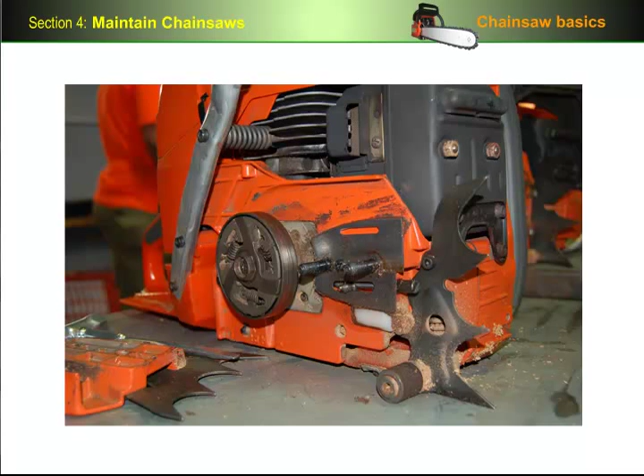The topics we'll cover are powerhead maintenance, guide bar maintenance, and chain sharpening.

The powerhead is the body of the chainsaw. Here's a basic checklist for carrying out a daily service on the powerhead.

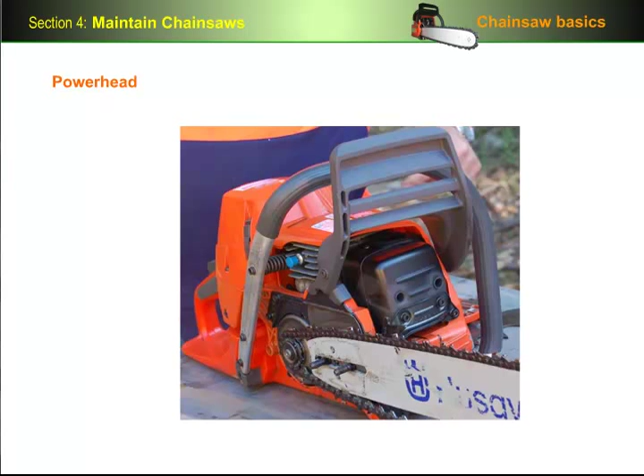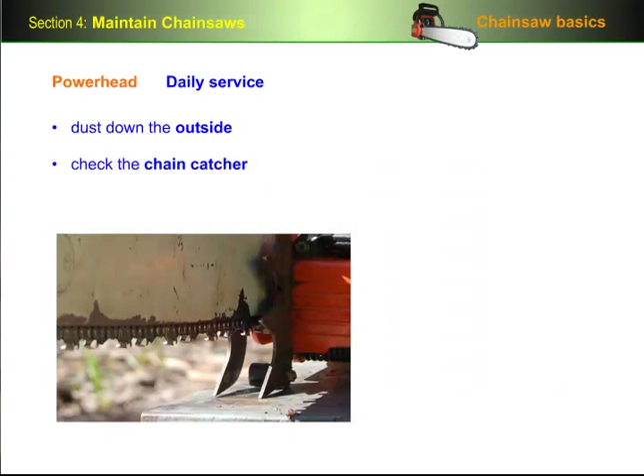At the end of each day's work, you should dust down the outside of the powerhead with a cloth or brush. Check the chain catcher to make sure that it's firmly fixed and not damaged, and that the throttle control and on-off switch are operating normally.

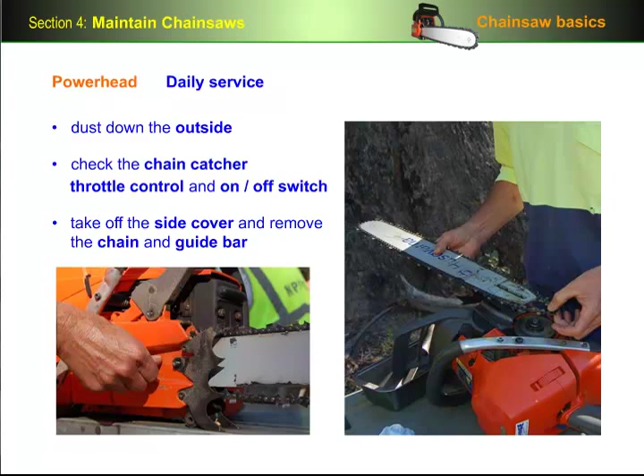Take off the side cover and remove the chain and guide bar. Clean around the clutch and drive sprocket with cleaning fluid and check the components for wear or damage.

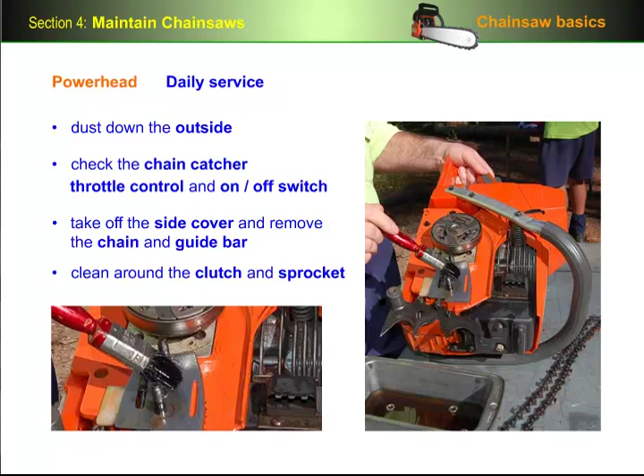Be careful when you're cleaning around the oil outlet for the guide bar to make sure no particles block up the hole. Clean out the inside of the cover, especially around the brake band if that's where it's fitted. Also check the brake band for wear or damage.

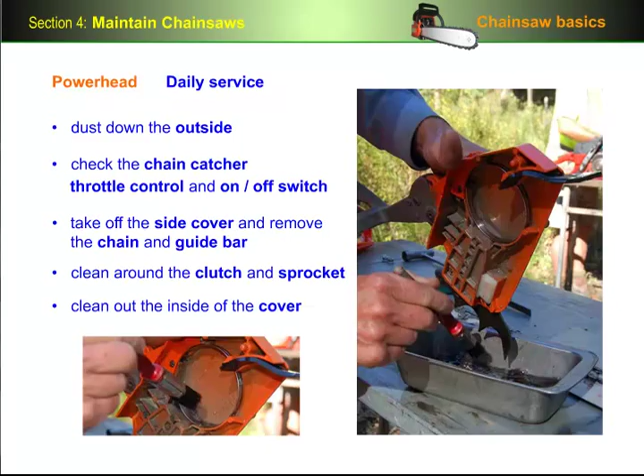Take off the top cover and clean the inside, including around the spark plug and the cooling fins on the motor, and check the spark plug lead to make sure that it's firmly in place.

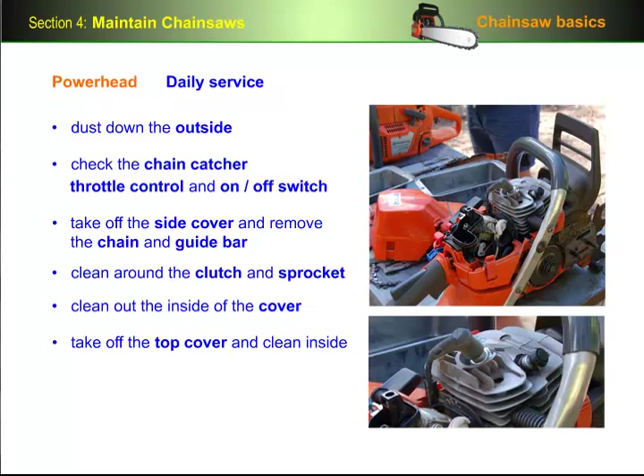Take off the air filter and tap out the dust. If it's still dirty, soak it in a solution recommended by the manufacturer. If it's damaged, replace it with a new one.

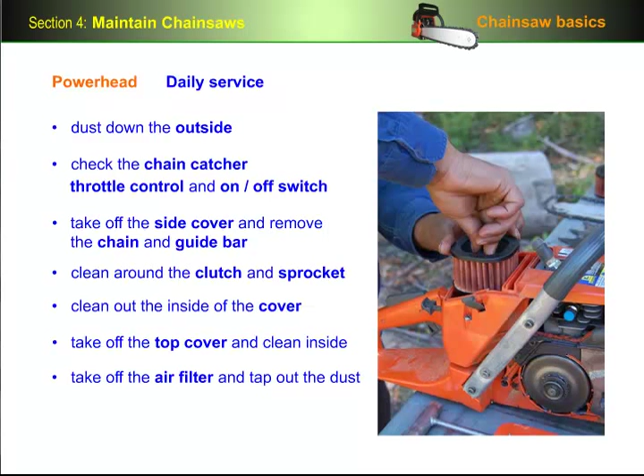Finally, check any other fittings to make sure they're secure and undamaged.

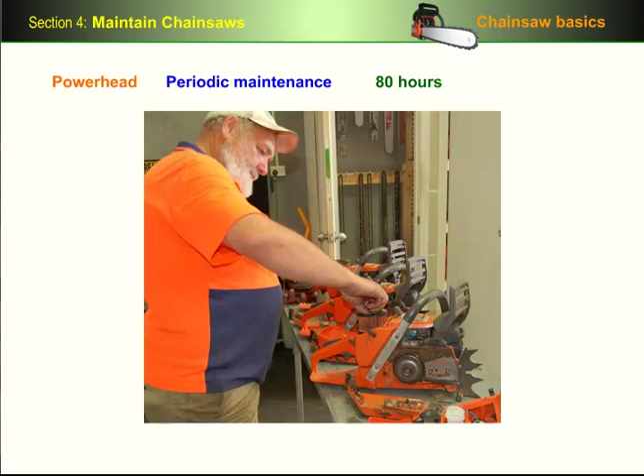A more extensive periodic maintenance needs to be carried out every 80 hours of chainsaw use. This is most likely to be done by the maintenance staff at your workplace or the local dealer.

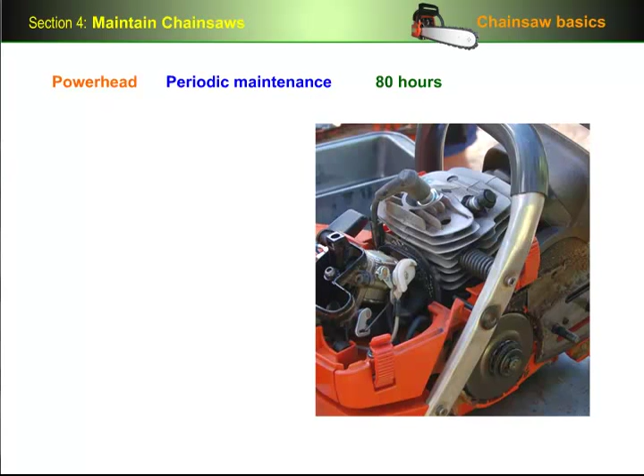During this service, the mechanic will check the spark plug by examining the gap and making sure the connection is sound. Replace the fuel filter if it's clogged, and wash out the fuel tank if necessary.

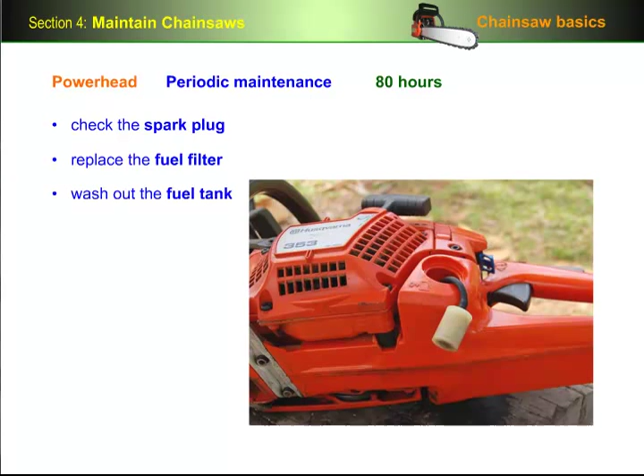Remove the fan housing and clean the fan blades. Check the anti-vibration mountings for looseness or deterioration.

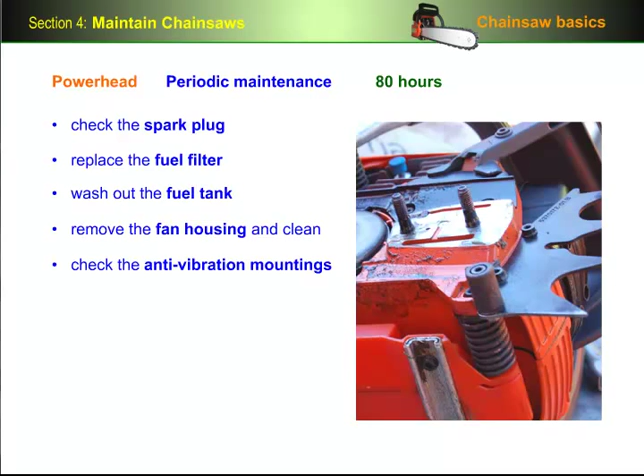Check the drive sprocket for wear and replace it if necessary. Some manufacturers recommend that the drive sprocket be replaced every time you fit a new chain. The sprocket bearings also need to be greased at regular intervals.

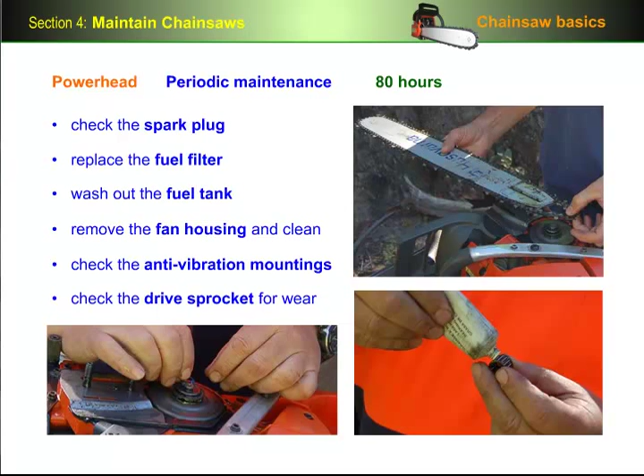And if the motor isn't running properly, the mechanic will also check the carburetor and adjust the idle and high and low speed jets if required.

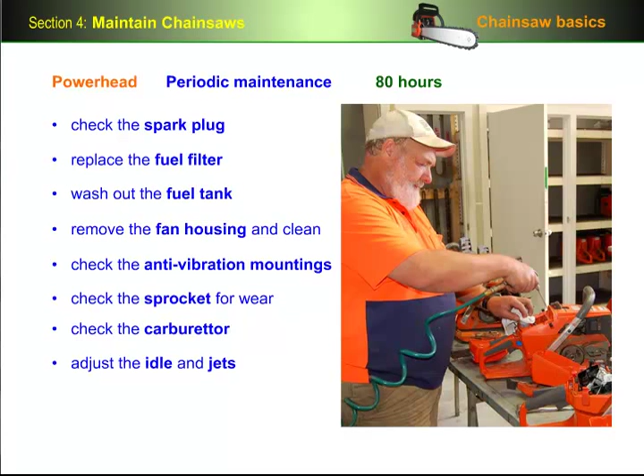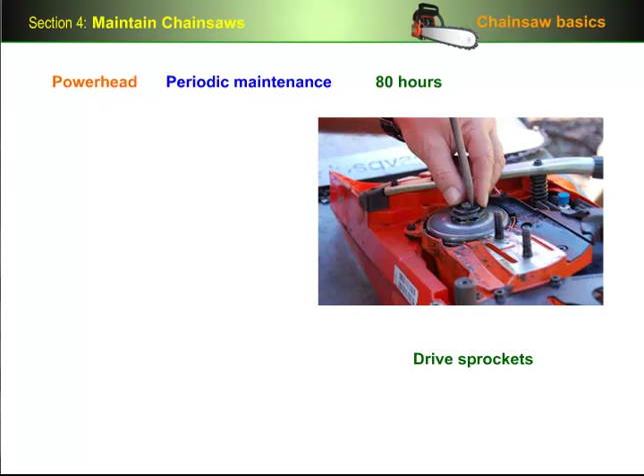Before we leave the powerhead maintenance, let's look at the two basic types of drive sprockets that you're likely to come across. A spur or fixed sprocket is permanently attached to the clutch drum, so when it needs to be replaced, the whole drum is replaced. A rim or floating sprocket, on the other hand, slides onto a hub which is welded to the clutch drum, which means that you can replace it separately.

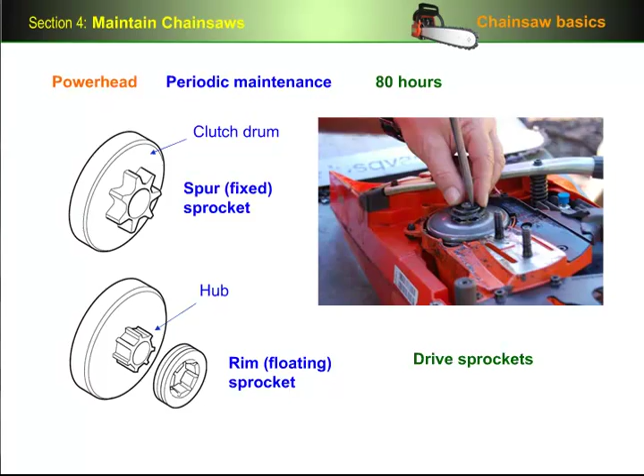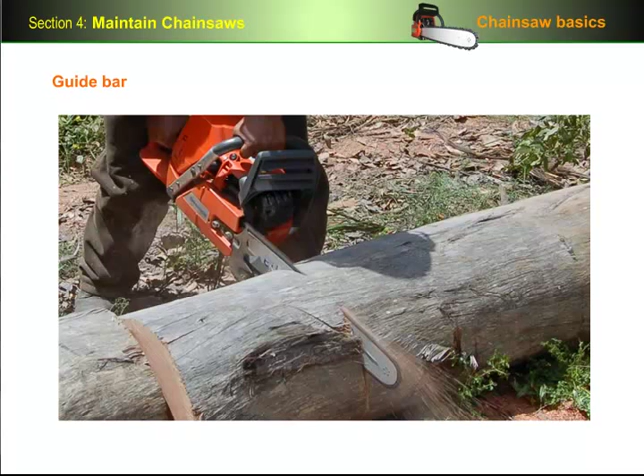The guide bar needs to be in a sound condition to allow the chain to run through it smoothly at high speed, particularly when it's under a heavy load while it's cutting. Here's a checklist for the daily service you need to carry out on the guide bar.

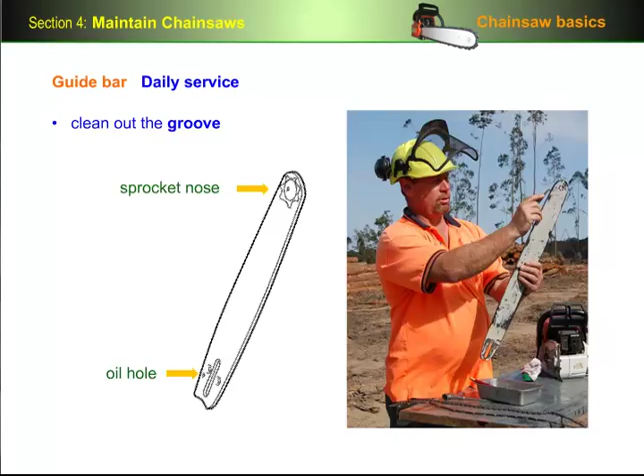Clean out the groove all the way around, paying particular attention to the oil holes and the sprocket nose. Check that the sprocket nose rotates smoothly.

Each time you put the guide bar back on the saw, turn the bar over to help even up the wear on both sides. The best way to remind yourself which way the bar should go is to look at the writing on it before you take it off and see whether it's the right way up or upside down.

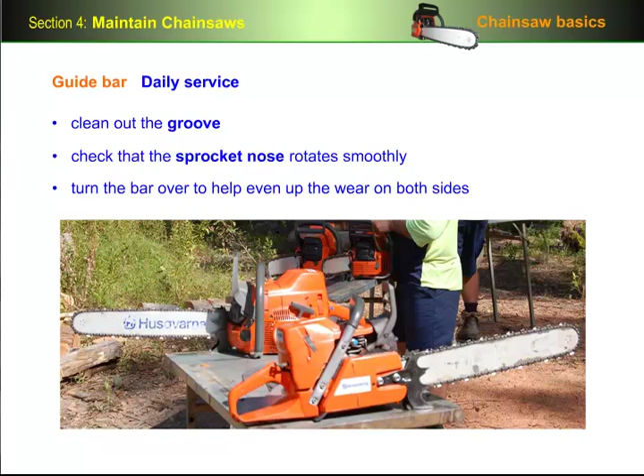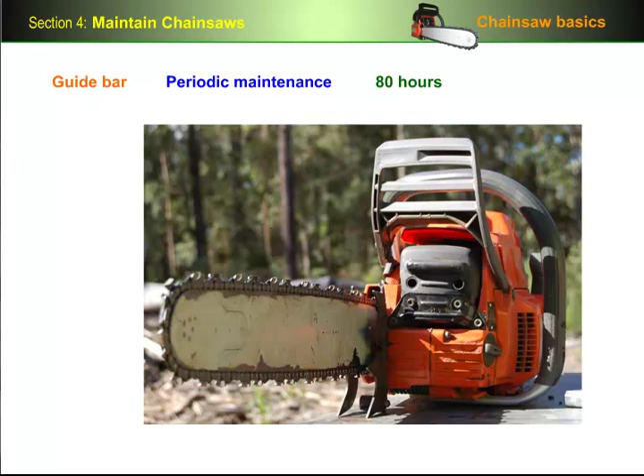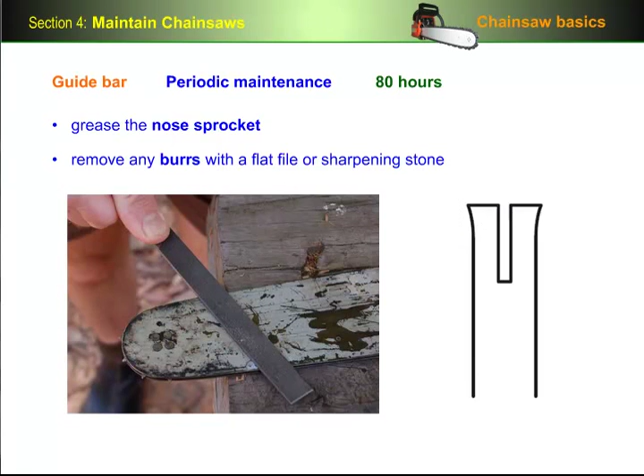Like the powerhead, the periodic maintenance on the guide bar should also be done every 80 hours of chainsaw use, where either you or your maintenance person should grease the nose sprocket if it's recommended by the manufacturer, remove any burrs on the edges with a flat file or a sharpening stone, and check that the rails are even and that there isn't excessive wear in the groove that would make the chain sloppy.

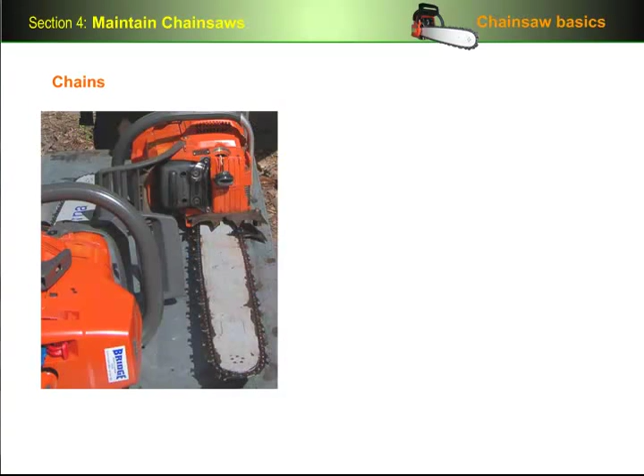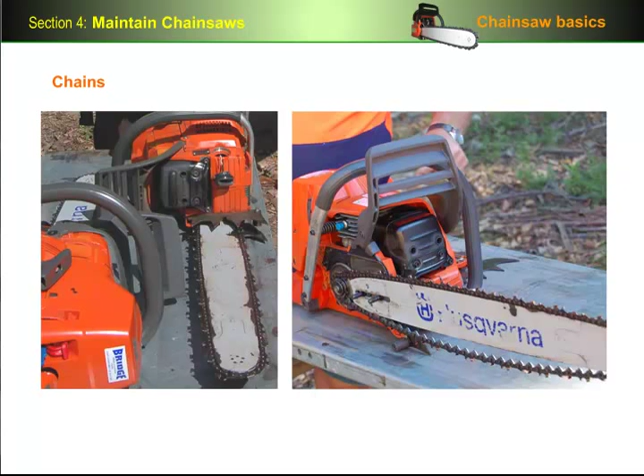Now let's look at chains. There are different designs and sizes for chains, with particular ones being used for certain types of cutting and different saw and guide bar sizes.

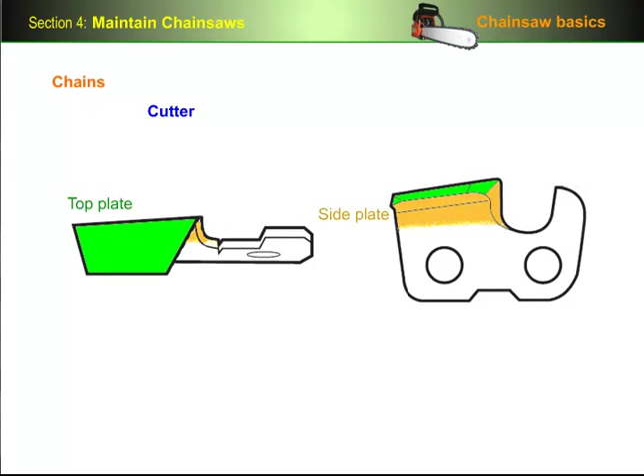However, all chains have the same basic components. The cutter has a top plate and a side plate, both of which are sharpened at the front to a fine edge. The area where they meet is called the working corner, because it's where the cutting action begins.

The depth gauge at the front of the cutter controls the amount of wood taken out at each bite, and is set at a height that allows the cutter to remove just the right amount of wood for maximum efficiency.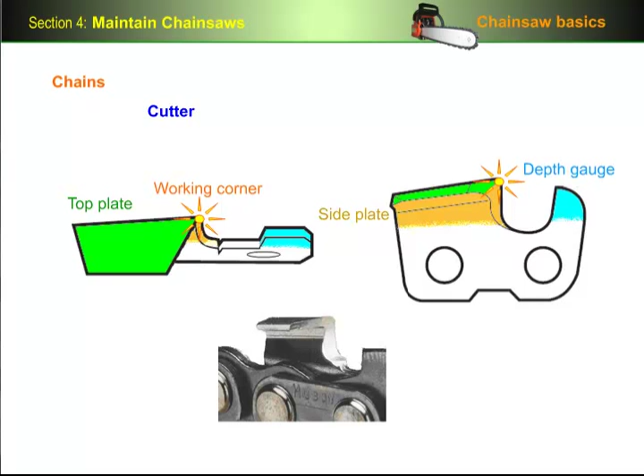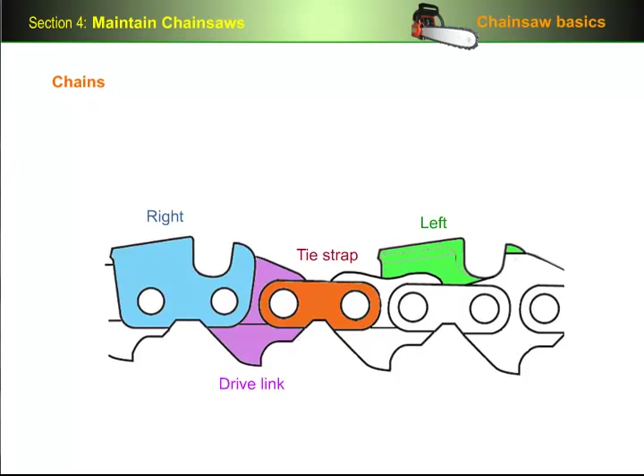Right and left cutters are positioned alternately along the chain to enable the saw to cut evenly, with tie straps and drive links in between, attached with rivets. Each drive link has a tang at the bottom which allows the sprocket to drive it forward.

The hook at the front is also designed to pick up oil for lubrication in the bar groove, and to keep the groove clean as it runs through.

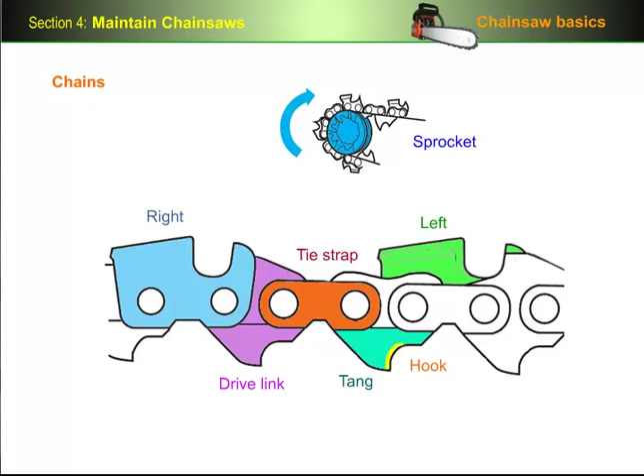Reduced kickback chains have some form of ramp on the drive link or the leading edge of the depth gauge, to help guide obstacles smoothly over the top of the depth gauge.

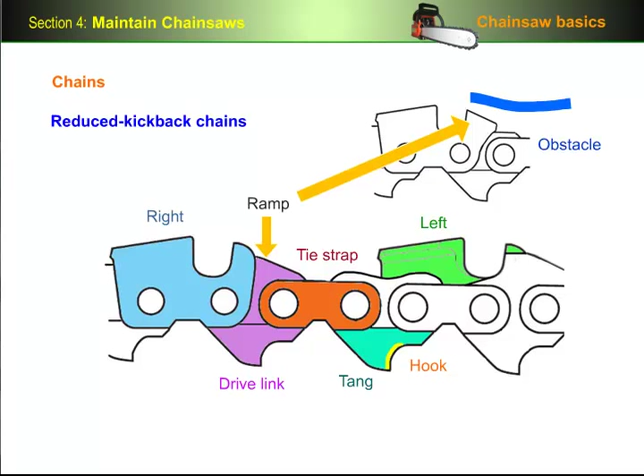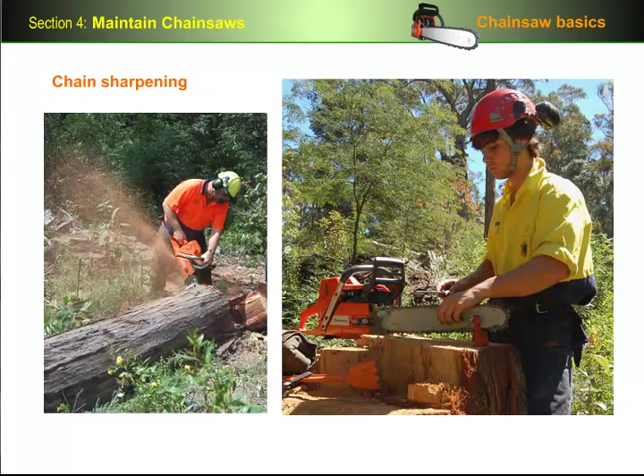Chain sharpening needs to be done frequently, such as every time you fill the tank with petrol. But you may need to do it more often than that, especially if you're cutting through a log containing dirt or a termite pipe, or if the cutters accidentally hit the ground while the chain's still moving.

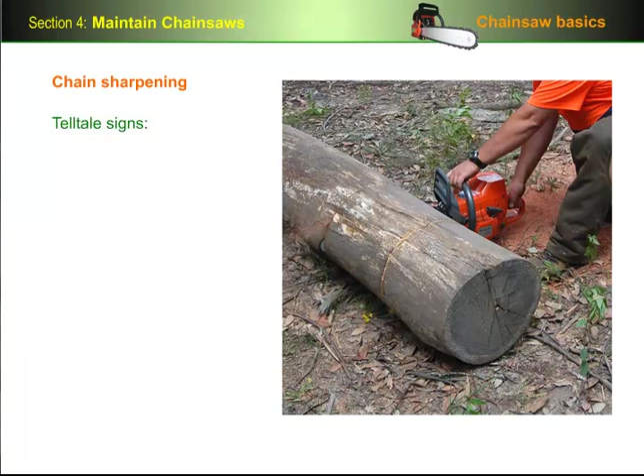The telltale signs that your chain needs sharpening are: the sawdust produced goes from small chips to a fine powder, you need to apply more force than usual to get through the cut, or the saw starts to run off in the cut.

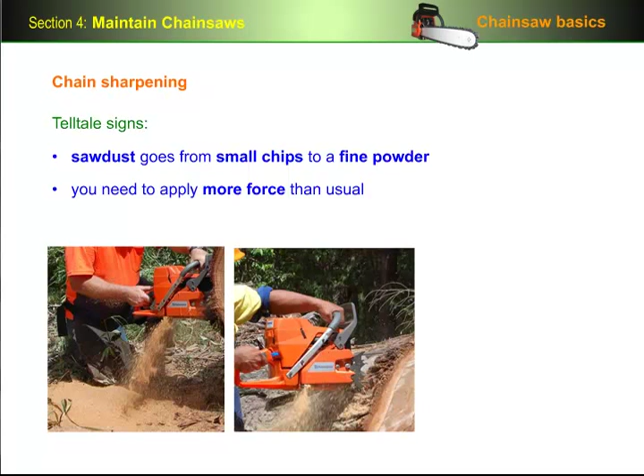Before we look in detail at sharpening techniques, we need to talk about the 3 basic profiles of cutters available, because this will affect the way you sharpen them.

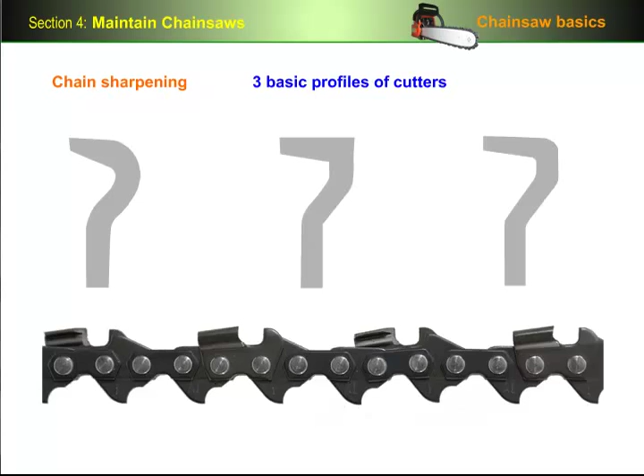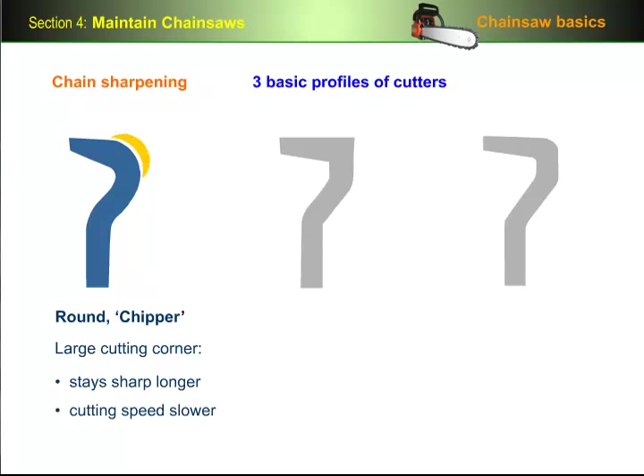The round or chipper profile has a large cutting corner, which helps it to stay sharp for longer, but makes the cutting speed slower. The square or chisel cutter has a very fine cutting corner, so it cuts faster, but is more easily blunted by abrasive materials.

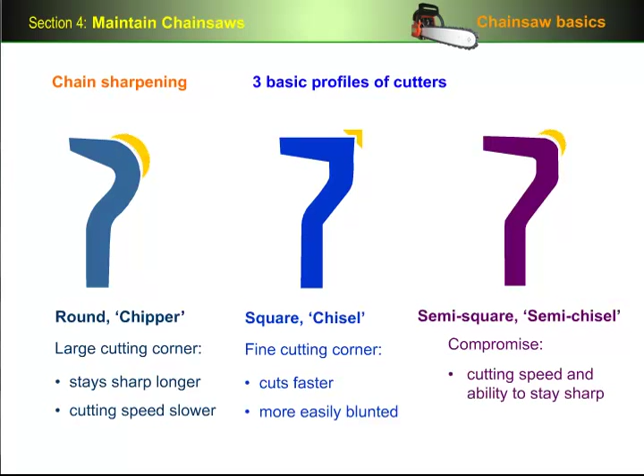The semi-square or semi-chisel profile is a compromise between the round and square profiles in terms of its cutting speed and its ability to stay sharp.

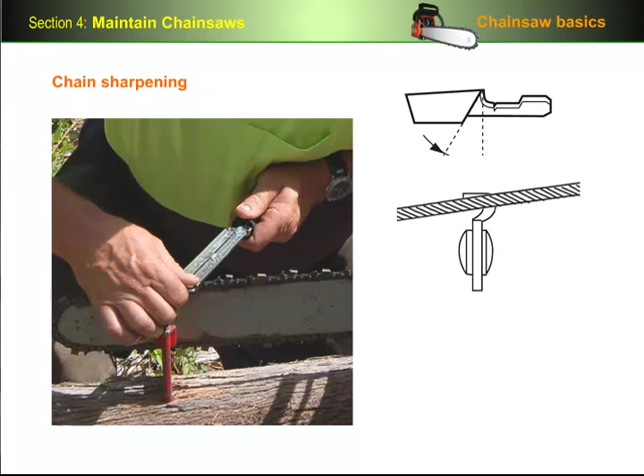The file size you use and the cutting angles you work with will be determined by the profile you're using and also what pitch the chain is.

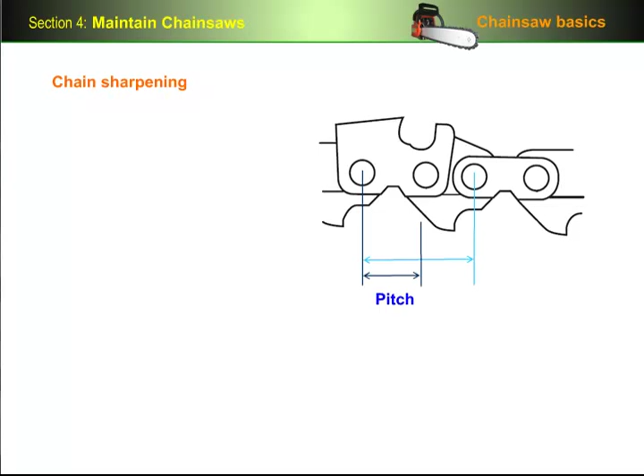Pitch is measured by taking the distance between 3 consecutive rivets and halving it. Naturally, the pitch is always going to be the same for the drive sprocket and the nose sprocket.

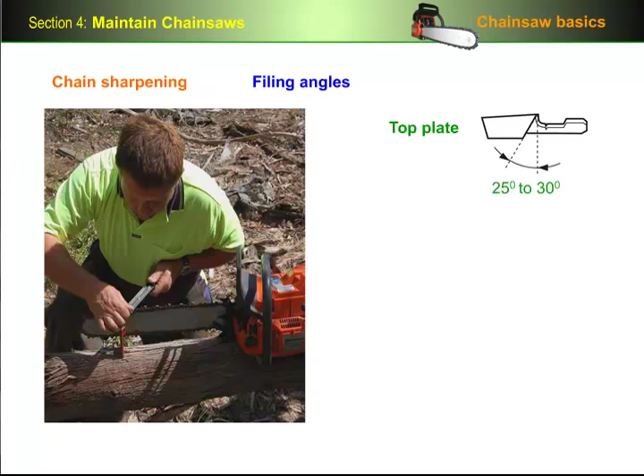The filing angles will be set by the manufacturer. Top plates are often filed at between 25 to 30 degrees, and the side plate is generally filed either flat or with a 10-degree tilt, depending on the profile you're using. But always check with the chain manufacturer's specifications before you start to sharpen your own chain.

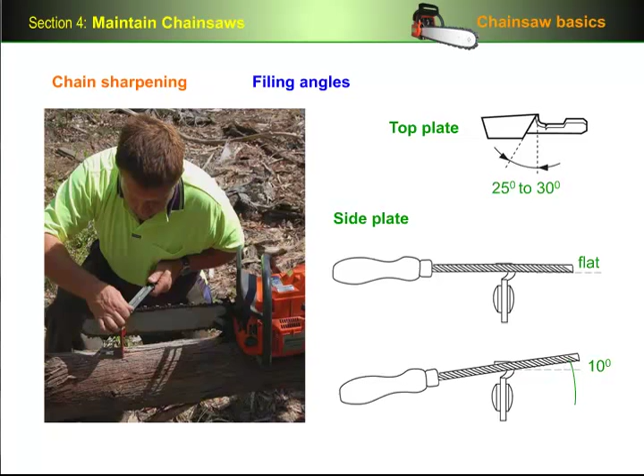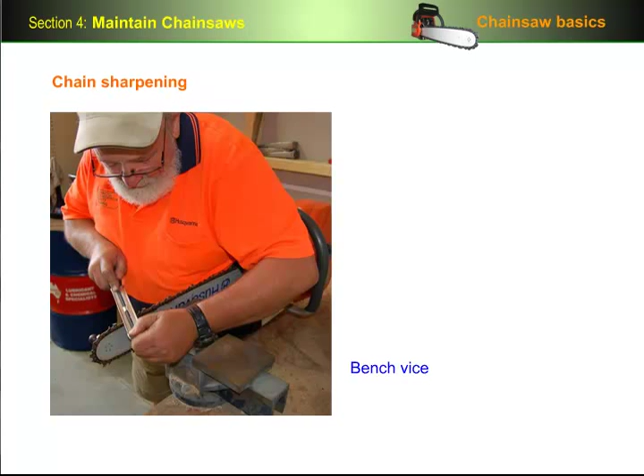The easiest way to file cutters by hand is to use a vise and a file holder or gauge. The vise can either be a bench vise, if you're in a workshop, or a stump vise, if you're out in the forest. There are different types of file holders around, so you can choose the one you feel most comfortable with, and follow the directions on how to use it.

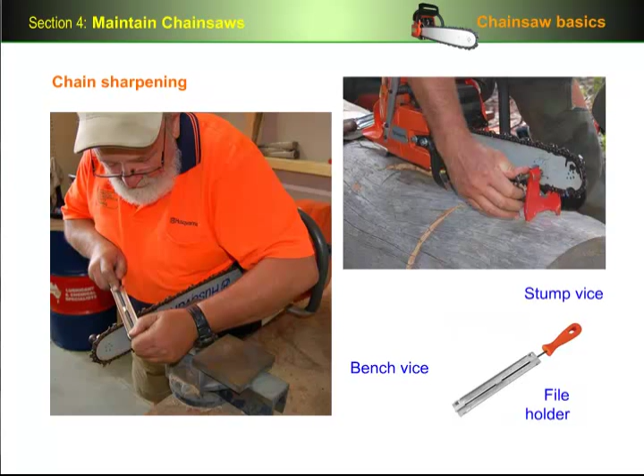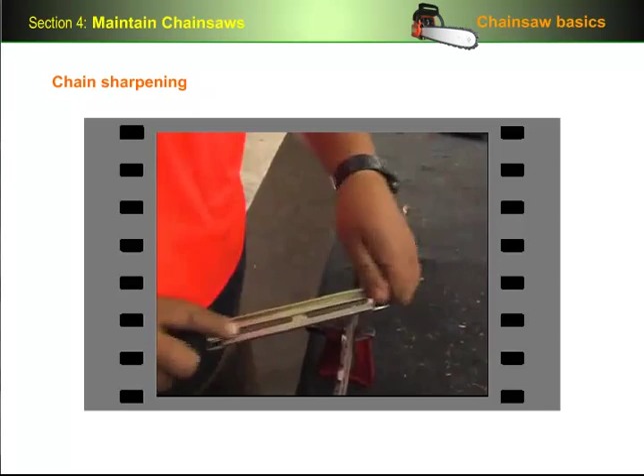Here's some general hints on filing cutters. Use a full-length stroke, filing from the inside to the outside, and file until you've removed all of the damage from the top plate and the side plate. Make sure that the file holder rests on both the top plate and the depth gauge.

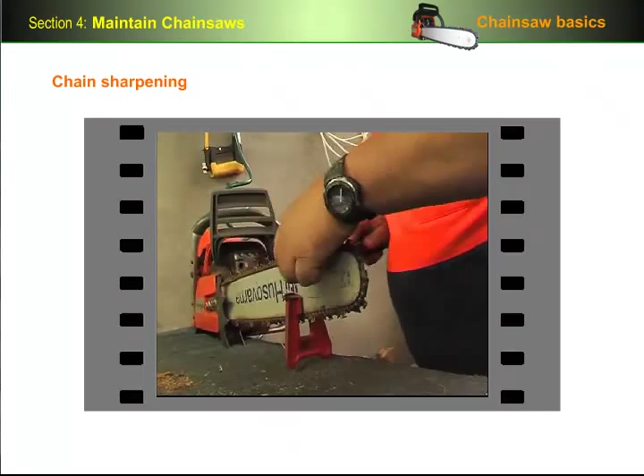Work around the chain, skipping every second cutter so that you're only filing the cutters that face the same way, and then change sides to do the other set of cutters.

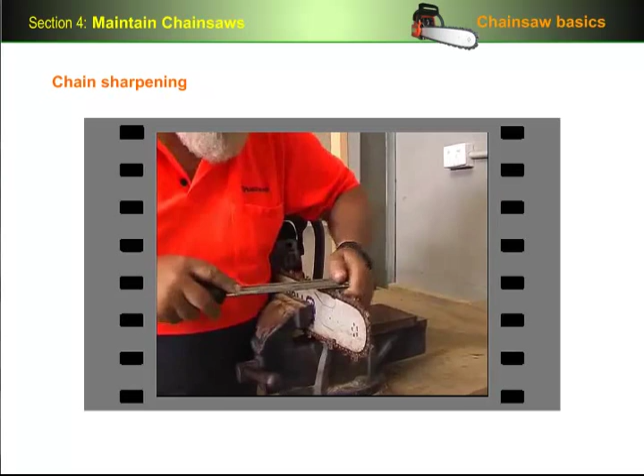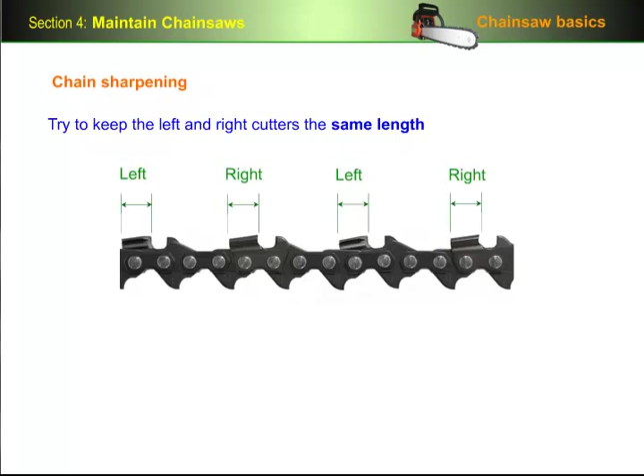Try to keep the left-hand and right-hand cutters the same length, so the chain doesn't develop a chatter or excessive vibration when it's cutting, or start to cut unevenly. If the chain is oily, cut some dry wood to clean the chain off before you start filing.

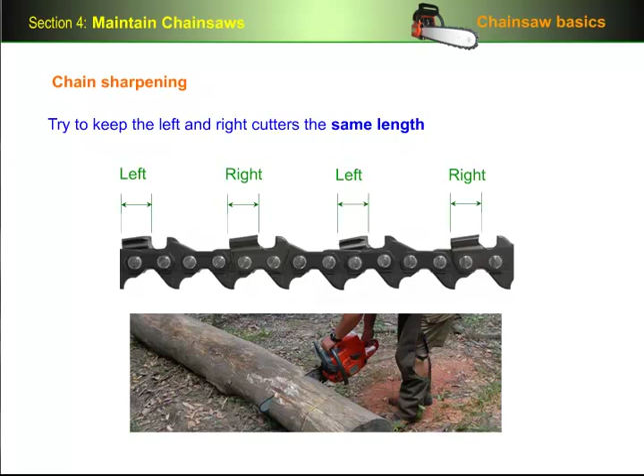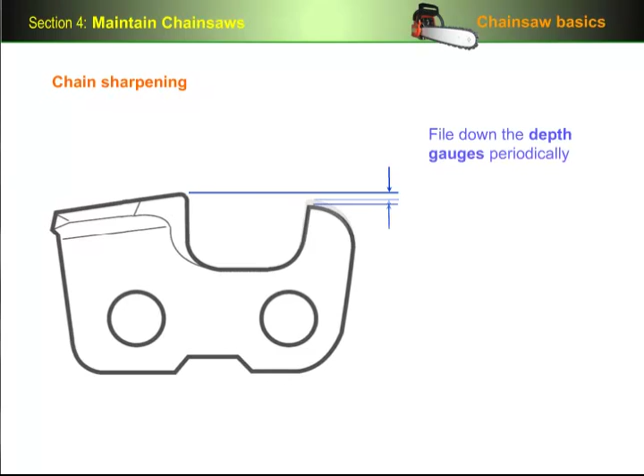Each time you sharpen the cutters, they'll get a little bit lower in relation to the depth gauges. For this reason, you'll need to file down the depth gauges periodically, probably every 3rd or 4th sharpen. Again, the settings you use will depend on the type of chain you're using and the wood you're cutting.

Remember that the depth gauge setting is crucial to maintaining good performance with your saw, so you need to check them regularly.

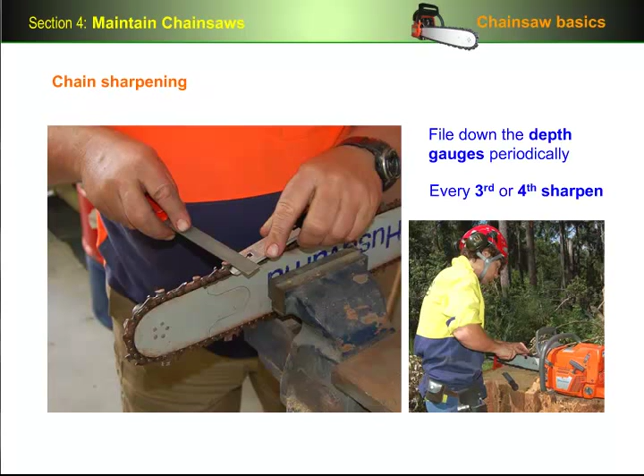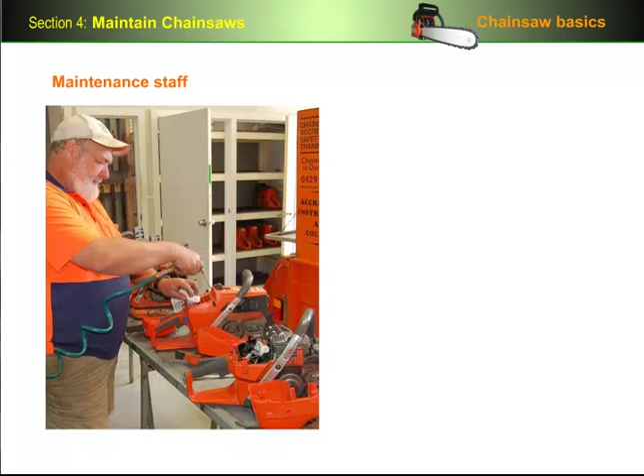If your workplace has maintenance staff that do all the general saw maintenance and chain sharpening, you don't need to worry so much about the periodic servicing. But you still have to be just as careful with the daily safety checks and chain tensioning, because in the end, you're the operator, so you're responsible for making sure the saw is running properly.